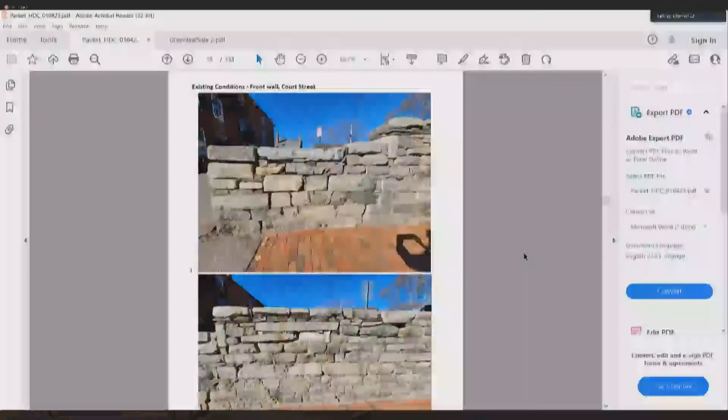You'll see from the photos in the packet it's mostly the old original stones, but there's also a mix of little pieces stuck in. There's mortar in some places, and some newer stones, which you can see are of a different type of granite—split and drilled. They're not the same stone as the original; they're a different color and texture. That's the wall along the street.

These photos are sequential, walking down the sidewalk from west to east. The first photo is at the driveway that ramps up into the parking lot. I took three paces for each photo, so that's about 9 or 10 feet of stride to get to the end. All the way down Court Street are close-up photos so you can see the nature of the stone and the work that's been done.

There is a side wall perpendicular to Court Street, along the property line between this property and the temple. As we go towards the back of the property, it disappears into the hill. It is falling over, it has fallen apart.

At the bottom, there used to be a firehouse, so there are brick remnants of the firehouse's foundation attached to that wall. There's some brick and concrete in some parts, and a tree is growing out of it on the uphill side before it sort of disappears. So that section is also proposed to be removed and rebuilt, so it's sound.

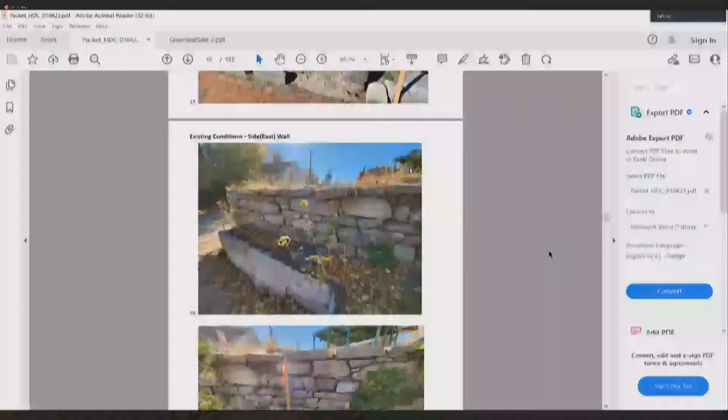All right. So we had intended to keep this wall, and we redesigned the building to do that. And then when we started getting on site to investigate digging the foundations for the building that is set quite behind it, we found more bedrock than we had expected. And in fact, some of it is contiguous and right underneath this wall. So any excavation or removal of the bedrock will cause vibrations which could jeopardize this wall, and we want to protect it.

We looked at shoring it in place and putting supports on either side, but to do that there are a few issues which are described in here, and Lee can describe a little bit more. It requires holding the braces together, which would have to go through the wall. Because this wall is 3 foot deep at the bottom, it's 4 feet thick, it's 2 to 3 feet at the top, you can't just drill through it without piercing stones. The mortar joints don't go straight through, it's a multi-width wall, so that would cause some damage.

Also, we need to go under it in 2 locations for street utilities, electric service to the building, and the sewer connection. There's also no footing, there's no frost wall under this wall, which is one of the reasons it moves over time. We feel it would be more stable if we could put a proper 4-foot frost wall underneath this so it doesn't move in winter, and also to reinforce the back structurally so that when it is backfilled, it doesn't keep leaning over and requiring repair.

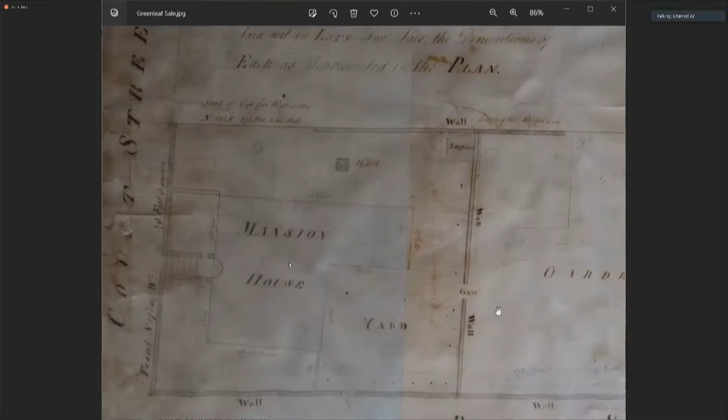But the next slide took this map and we superimposed the boundaries of the property as it is today using GPS technology. I'm working on it, all right, well, he's working on it.

And I just want to clarify, I've heard the term used several times tonight that this was a pound, where pigs were held. Actually, this was called a place of refuge during the Indian Wars. There is no way you'd have a place of refuge with a 4-foot wall. It was called a castle for a reason, the walls were high enough that you couldn't penetrate them. So the idea that this was somehow a pound for the city doesn't reflect the facts. Let me show you right here.

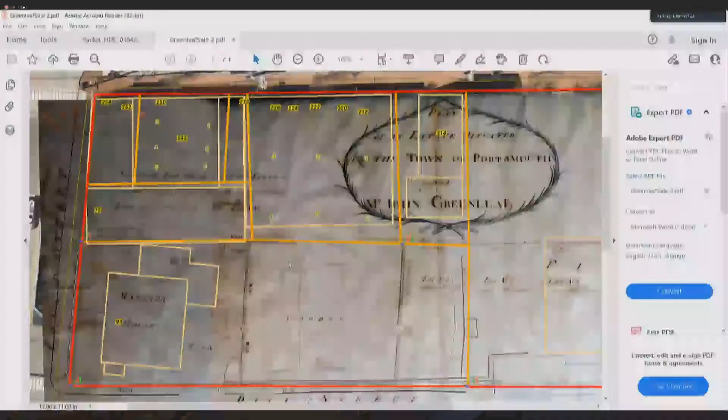It says garden. These are the boundaries right now. This is the wall, red on the bottom, turning yellow as it goes up. This line here is another boundary between this part of the garden and the stables. So within the property, you had the garden, the stables, which mansions of that era had for carriages and horses, and a place to grow the food that the inn would consume.

This was called the Brewster Gentile Inn. There is no way that they would have allowed pigs to be running around next to a genteel inn, any more than we would have pigs running around the Sheraton today. It's pretty comparable to that. So to say that that was what it was in those days, I kind of doubt it.

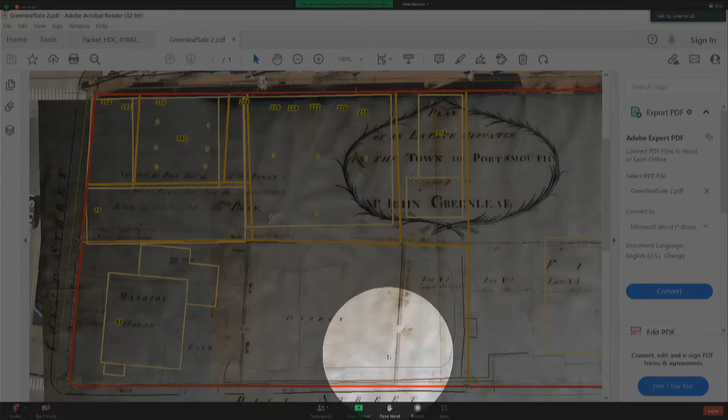I think the map kind of speaks for itself. The fact that there were lots available in those areas, maybe the town took it over for that purpose, but they were not within the retaining wall. I grant you the retaining wall in this area was not managed right, because when you look at it, it was not preserved. People were careless many years ago. But this one here is very prominent. Everybody can see it. It's part of the original structure.

I just brought this in because I wanted to show you there is more to it than we have been told tonight. I realize you have to take it down in order to protect it, and when it comes back up, it's not going to be the same. I'm torn because I know what you're up against, and I know you have to do something. But I'm also on the side of history. There's so little left to preserve.

Have you seen that little model at the entrance of this hall? That's the old State House, because Portsmouth used to be the capital of New Hampshire in monarchy days. The portico of that State House was where George Washington came and spoke to the people in 1788 or 89. That structure was removed because it needed to make room, right across from North Church, at that intersection. It was removed so we could make room for the new, and put aside to wait until we could preserve the old history somewhere else.

That building was cut up in pieces and stored in a container in Concord, New Hampshire. I've inquired—there's nothing left other than just rotten wood. Nothing left of that structure. That's where the city council met in those days. That was one of the most important buildings in Portsmouth, next to the church. That's where they usually build them.

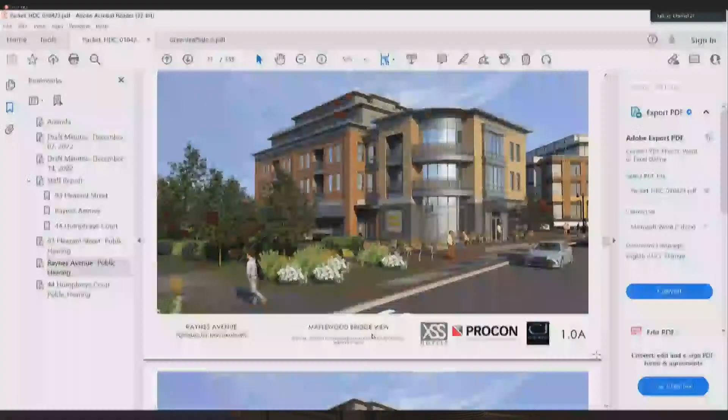When we last met, we had some very in-depth discussion regarding the liner building on Maplewood Avenue, the 3-story piece, and there seemed to be consensus among everyone that making it look like a somewhat different building, and essentially, I think as you can see from the renderings, we've really taken it to another level of development, developing the details, developing some of the expressions of window patterns and so forth, kind of making everything more cohesive.

So what we were stuck on was whether or not it should have a much more clean, modern look with a projecting balcony on the corner, or whether it should be more of a flush representation as you see on 1.0A. So starting with 1.0A, we're looking at the flush execution of the balcony here. What am I doing, Nick? It's not lighting up. There we go. This flush balcony.

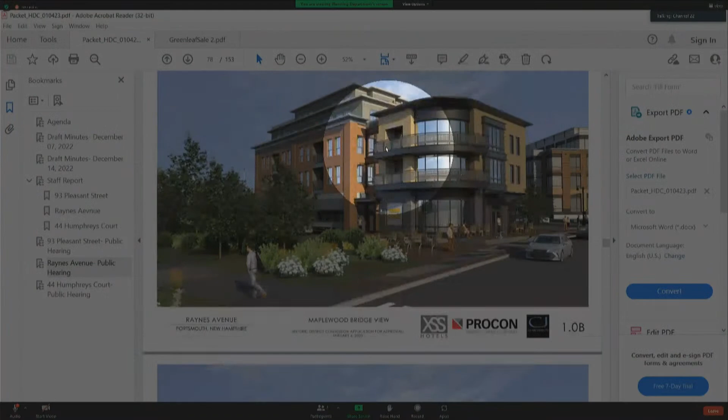And then looking at 1.0B, we have a more prominent, darker color, and we've projected the balcony and wrapped it more entirely around here.

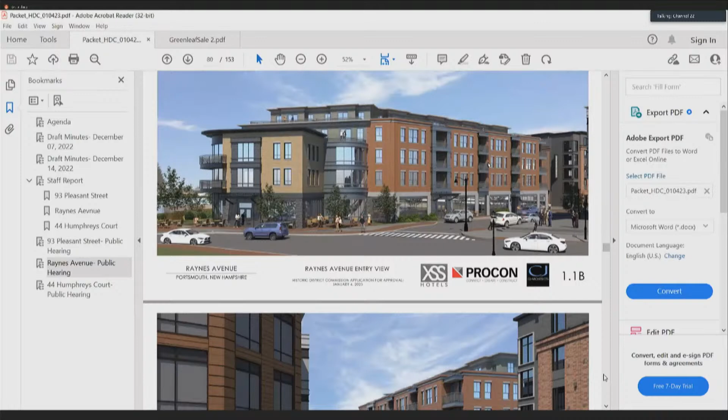When you look at 1.1A, that again is the recessed, the more flush balcony look. And when you look at 1.1B, we have the projected balcony cornice with the more black finish. We've also represented 1.2 showing the darker cornice and the gray cornice on 1.2B, so there's not a whole lot of difference there. And on 1.3, again, just showing the balcony projection all the way to the right to give you an idea of what it would look like from that perspective.

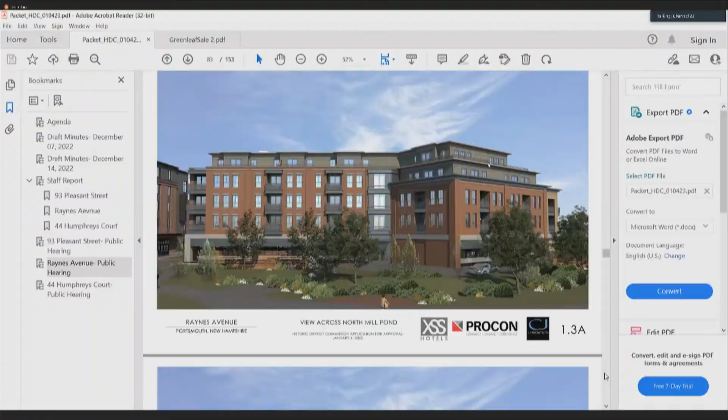You're just sliding right through this. Well, I'm going right through. I have a couple questions, so I understand. That is the end of my choice presentation. That's it? Yes. Does anybody have any questions concerning the initial 1.0A or 1.0B?

Do we all see the differences? Does anybody have an opinion? I think it's most prominently represented in the first two images, the 1.0 series, instead of what we have up. Any opinions? Does anyone have an opinion? Rich, you've been oddly quiet. Yeah, the cornice and the balcony.

I think I'm preferring the more flush balcony. I think it just is a softer feel, but I'm not against the other projected balcony either. I kind of like that cornice.

Either way, I think you've done a good job of stepping down, so it steps down in the neighborhood nicely. I'm happy with that, especially the rounded edges and making it look like a different building that's just connected. But those are my two cents.

Any other sense? Reagan? Well, I agree. I think partially because I feel like you've just done a more thorough job of articulating A than B in your renderings.

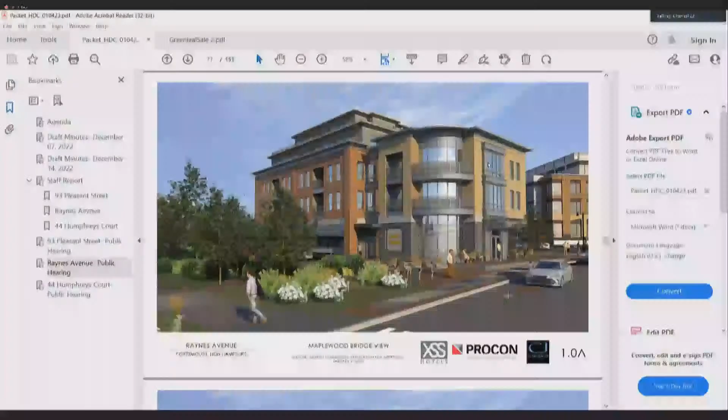I don't know how you're going to get that smooth, looks like a metal finish. An Alucobond finish. Okay. It doesn't seem to, that design and detail doesn't really seem to mesh with the building in general. So I think the simplified and more flush A version is more attractive.

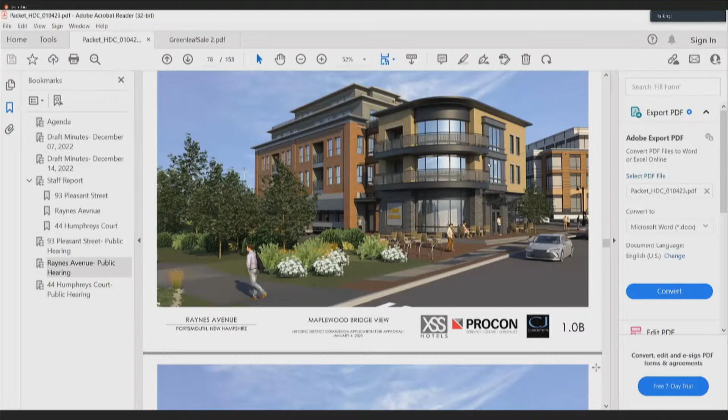Okay, I would just simply say that either one of these are acceptable in terms of what we should be looking at, so either one.

Mr. Chairman, I would agree with Mr. Ryan. They both have, they're two different sides of the same coin. I think the pieces and parts are very much, one gives you more of a horizontal feel to it, the other reinforces the vertical nature by breaking that balcony up with the flush model. And I think, as almost always, Martin is correct.

God bless you. Can I just say, I wonder if it's probably way past time to have this, but over the Christmas break, I've been thinking about this building and where this is headed and how poorly equipped I am to even make any assessment about it. But I keep wondering why this building doesn't have a side that faces the water. If I were building something with this much coin and this depth of plan, why it doesn't look at the water at all.

And I'm reminded of the first building you showed us, 20 years ago, something somewhere in Baltimore, some piece that you'd picked up, a little bit of eye candy. It was a striking building, but what was interesting was that we really weren't looking at one end of it from a side street, that it was a view that the building had.

Well, in the last session, we implemented quite a few changes on the mixed-use building with projecting balconies and adding some different entry elements and canopies and so forth. So we made the siding darker and changed a little bit of the window pattern. So there were quite a few updates from the last round to the other building.

Did some work on the cornice, and I think everybody seemed relatively satisfied with the change, with the significant amount of changes from our last work session on the body of the building, on the 4-story and 3-story pieces of the building.

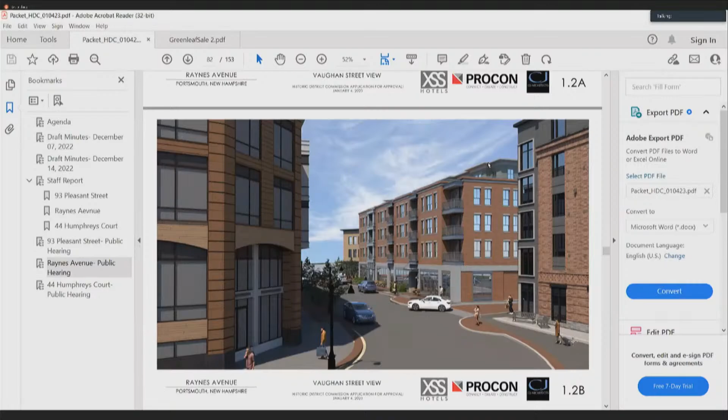The hotel is as it was prior as well. We've been concentrating, again, at the last work session, primarily on the mixed use and residential piece.

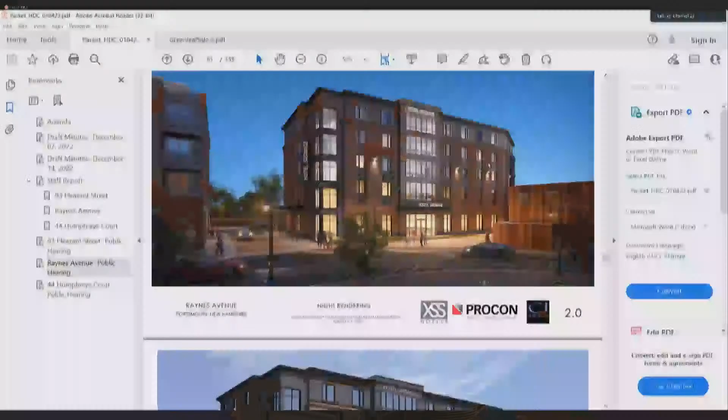Prior to that, we did quite a bit of work on the hotel in 3 or 4 consecutive work sessions where we arrived at this final canopy, the metal on the outside corner, and a lot of the brick texturing. There were quite a few updates a couple of work sessions ago, where we found it most beneficial to address one building at a time because they are fairly significant architectural creations, to work on one building and then now work on this building. But they are part of the same application.

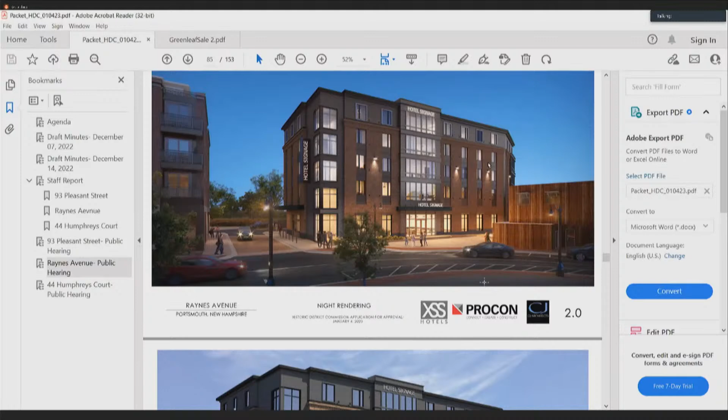Anybody else want to have anything to say? Nick, is it possible for us to look at the model? Give me a minute.

I will do the whole presentation when we let her do that, go to presentation. I mean, we're in work session now, but when we go to public hearing, I'll review the package. Okay.

So just to confirm, there were no other changes on B, C, or D, right? Just the cornice and that balcony shown in A? Yes, the cornice color changed, there were some color changes, the projecting balcony, and I believe we had consolidated all the window patterns because the smaller squares were not well received, so we went in and adopted all the same window pattern.

Well, you did drop a door in the rounded section, yes. And did you add a door? Is there a door on B? There is not, because it's accessible around from the projection, right? Okay. So that's where they'll store their furniture or something. I hope not. Oh no, I hope not.

On the right-hand side of the reconstructed timber pier, there's kind of an inlet, and then it curves around and goes back out onto city-owned property. But right at that location, the soil can be green. It's green there—I've seen it.

So, I know there was a dump. This is just the site plan, and I'm sorry, I should have probably brought this up at the work session, but are you aware of that?

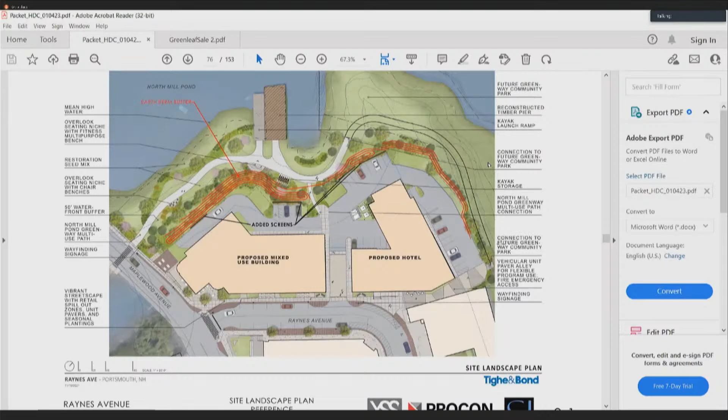I'm aware that there's an outfall for the city storm drain right there, with a head wall in that inlet area. We're proposing, as part of the site plan approval, providing an easement to the city to replace that. We'd also be replacing a lot of stormwater facilities and treating stormwater leaving the city streets as well as the site before it goes out. I wanted to get that particular bit of information into the public, because it's more than an outfall. There's some kind of dumping that had gone on there probably 100 years ago, and I suspect it's copper, but I'm not sure. That's the only question I have on your site plan. Thank you.

Is anybody else? Can I just say something about the site plan before we go into the details? I think, in fairness to the many speakers we've had over the many meetings who reference the 2015 vision plan, which was a charrette, a design charrette with hundreds of people participating.

There was wide public agreement on the vision for properties like this in the North End, on Raynes Ave, Green Street, everything we've been looking at in the last couple of years. I think everybody falls into this at a different level of either support or disappointment with perhaps the massing, scale, and rhythm of what's come to you on this site.

So I think that beginning the presentation on 1.0A, we've looked at the choices available for the building along Maplewood. Just to reinforce for people who are just joining us, this is the culmination of many, many work sessions on both buildings, both separately and combined. And I would say that we would stipulate that the flush balconies be a stipulation as the choice for approval, based on what I've heard.

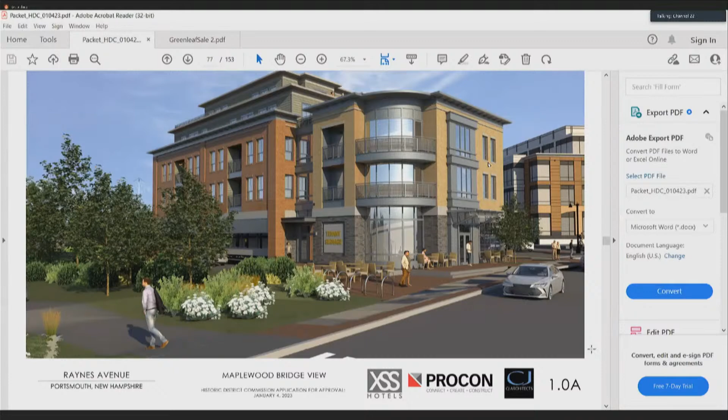So looking at 1.1A, you can also see the changes that were implemented during our last several work sessions on this mixed-use building. The final changes are projecting the balconies and redesigning the entrance.

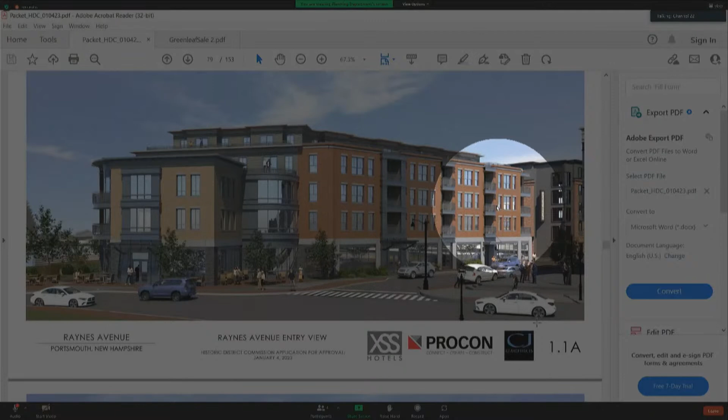Redesigning this main entrance of the residential, projecting these balconies, darkening the siding on the upper floors, and providing a whole new identity for the building along Maplewood. We also created a much more organized facade, and eroded the top of the cornice here at all the balcony locations.

Skipping B. Again, 1.2A is just another perspective of the changes I just described.

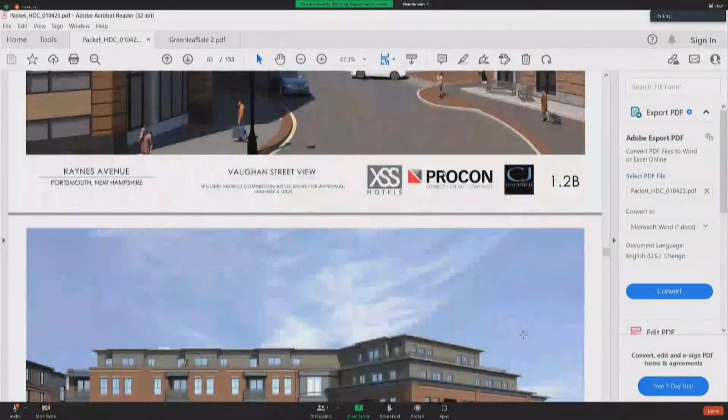1.3A carries the theme of projecting balconies around to the water side, again with a well-defined entry piece, and then the cornice drops down to a 3-story brick structure, an additional setback here, and then the penthouse level. The 4 stories and a penthouse drop down to 3, and then drop down to 3 without any structures above, sort of cascading down toward Maplewood.

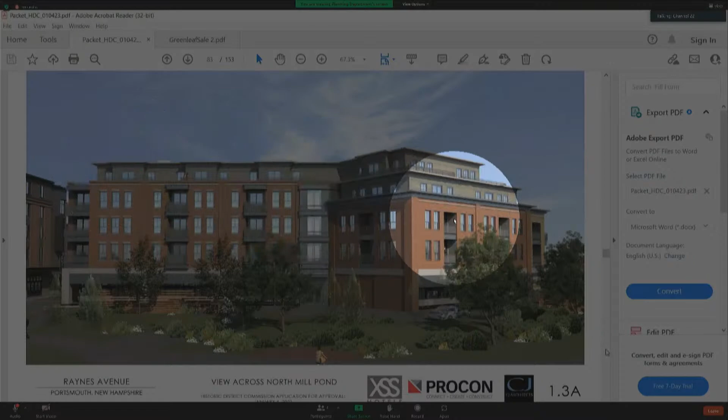And, you know, that is abandoning the 5-story building in this location.

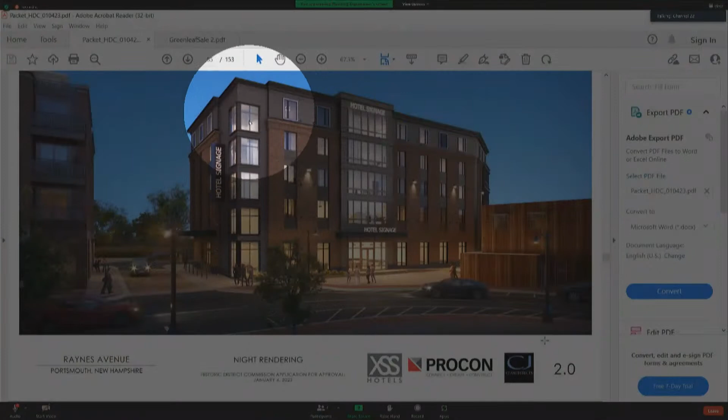Skipping B, moving on to 2.0, night rendering of the hotel. Again, illustrating the corner element that was brought into the design during work session, the more dramatic canopy with a little bit of a different look, more vertical dramatic glass elements here, and the brick banding is not as visible in the rendering, but we will see that in the following page on 2.1, where the textures are a little bit more prominent. Banding along here.

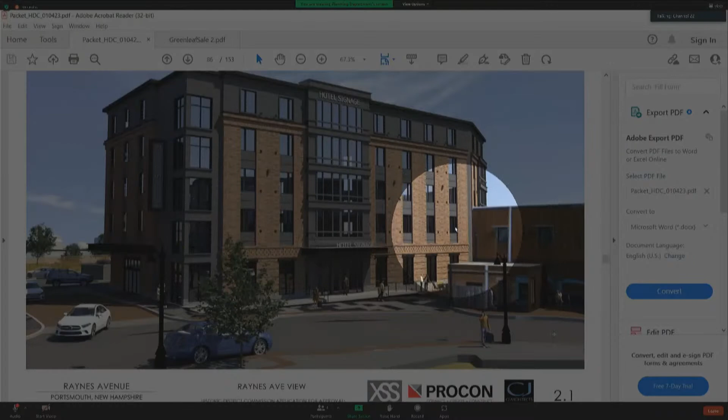A different metal element at the top, on the top floor, and then we also have a textured brick base along the entire first floor, and we added in work session a gray base color, again wrapping and supporting the base of the hotel.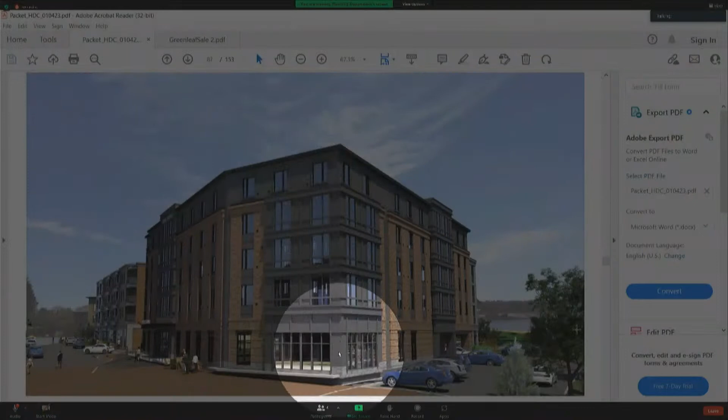2.2 highlights the dramatic corner overlooking 3S, and then another entrance here as you round the corner to the water side. Then when you get to 2.3, you can see that as we again approach the water, the hotel actually steps down to 4 stories for a bay of significant mass here on that corner.

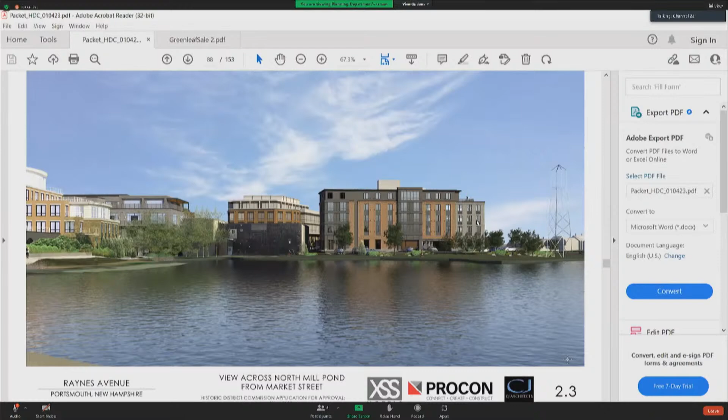2.4, close-up of that same view. Again showing the brick texturing band and the band in the base elements, and then also the cornice carries around. We talked quite a bit about working on the cornice during work session to give it a little more weight and volume.

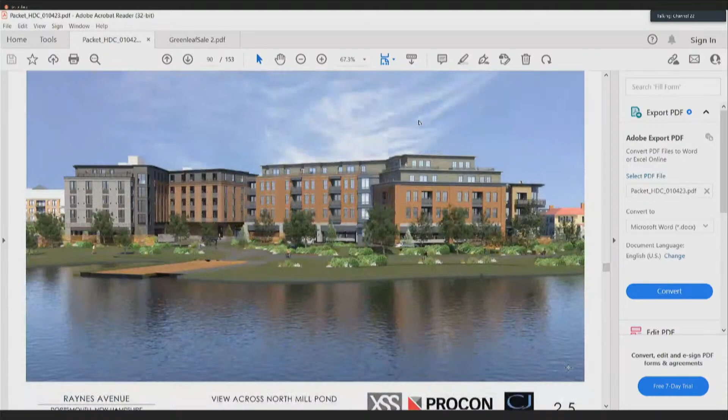2.5 illustrates the view from across the pond, through the park, and the restoration of the docking area or the pier, and then of course the 5 different style elements across the water side.

And then as I get to 3.0, in the interest of time, these are the construction documents required for submission to the board, to more detail, to represent all of the details of the building as well as the size and dimensional requirements. I'm happy to answer any questions that you may have on these.

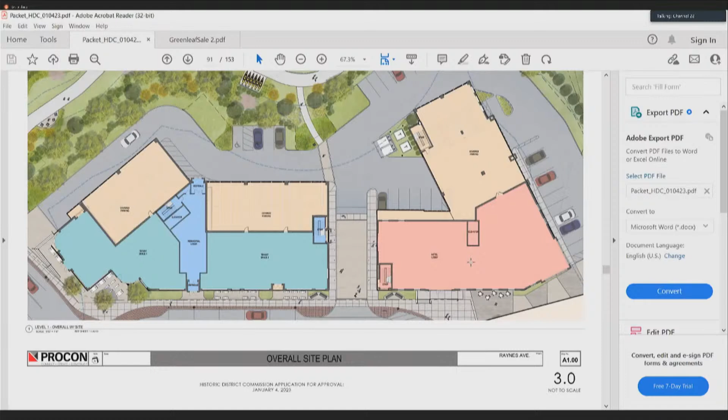At the end, we could possibly just move to section 5, because there is a significant amount there, but we could move to section 5 and look at materials if you like. Look at the 3D. We can do that too.

Does anybody have any questions at this point? What has already been covered? No? You can see there's many, many details.

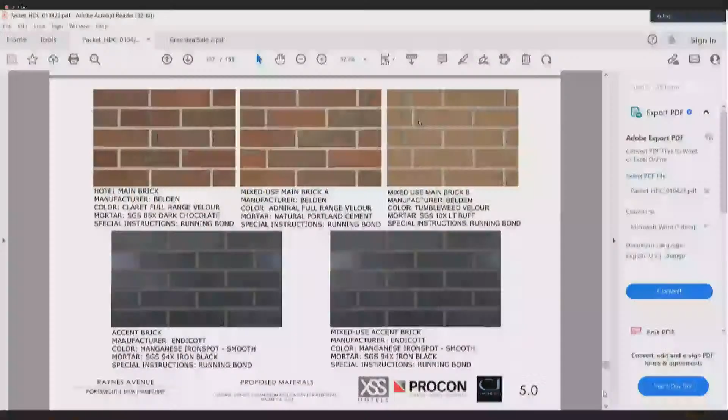Yes, there we go. So here in section 5, we're just illustrating the materials proposed for the project, which consist of multiple actual brick veneer colors, as well as the metal panels from Vitrabond, which is like a sandwich panel of metal for some of the siding elements, and all of these areas are called out on the elevations and indicated.

When you get to 5.2, we're using Marvin Essential, so we are not using any sort of vinyl products of any kind.

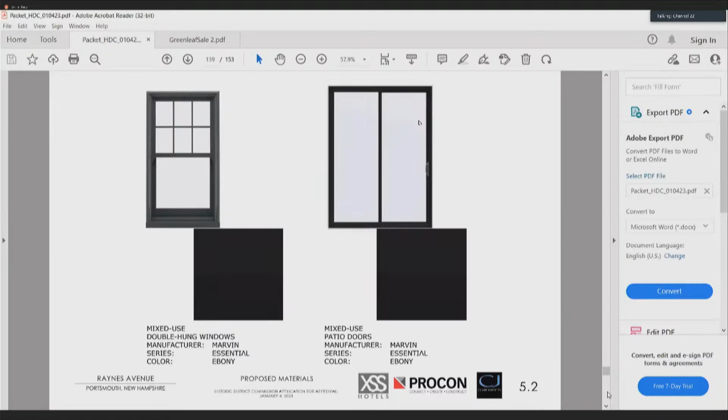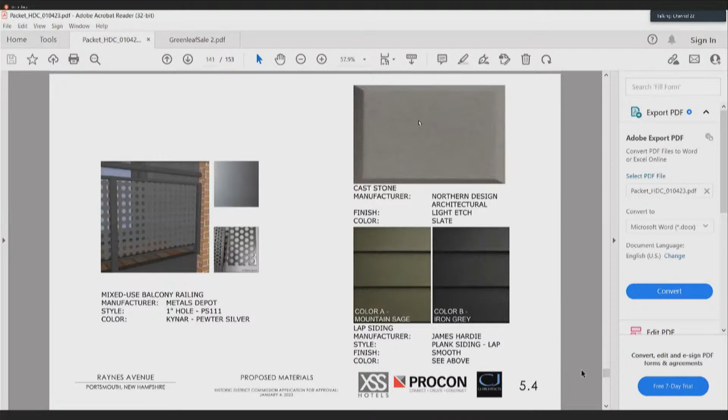Quality of materials has been a long-standing mantra of the Historic District, so I just want to reinforce that we are using the higher-end windows, actual masonry and metals, and not plastics and so forth. The upper levels do go to a lighter material, where we are using siding in a pre-finished color, and then the balcony railings are also metal.

Continuing on to 5.5, the proposed light fixtures. And I think that concludes my presentation, unless you have any other questions that you'd like me to answer or any details you'd like us to go over.

Oh, I'm sorry, I have a material question. On the site plan, way at the beginning, there's added screens called out as part of the berm structure. Are the materials or style of those screens indicated anywhere?

That is a good call. Luckily, we have an example standing just down the block. I don't think they are identical, but I think the intent and what we had shown in the renderings was similar to what was approved and installed at 145 Maplewood, and also at the entrance to the future park. It's an IPE fence system. We could certainly stipulate that if the board likes, we could stipulate that be the material. It's a 6 foot tall fence, 1 by 6 or 5/4 by 6 at the base spaced, and then it's slightly smaller and varying widths as you get closer to the top, capped on top and sides as well. I think it does show up in the rendering.

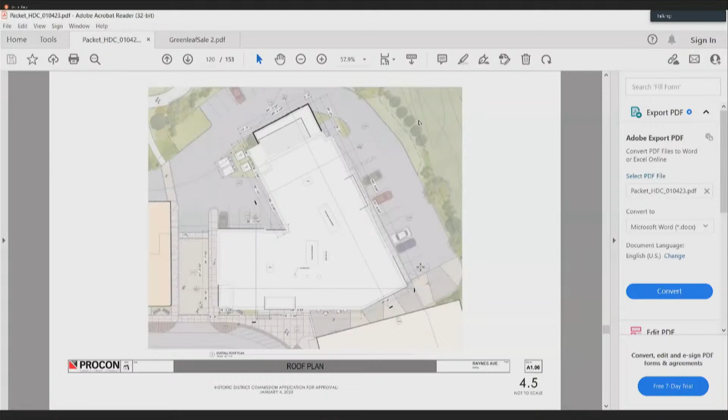Yes, that's true. 3.6, right here on the roof plan. It was 4.5 that's the plan, and if you look at the renderings you can see them. 4.5 shows them as well. If you look at the renderings, they have been modeled, and you can see - let's look most at 2.5, you can start to see them popping up in the model, because that's the farthest back view that we have.

There's only one elevator in that building? 2.5, yeah, the mixed use? Two cabs. Yes, one shaft, two cabs. One overrun then.

Is that the color you're going to screen it or paint it? And is that metal? Those are just the masses - we haven't modeled each individual piece of equipment, but those are the massing.

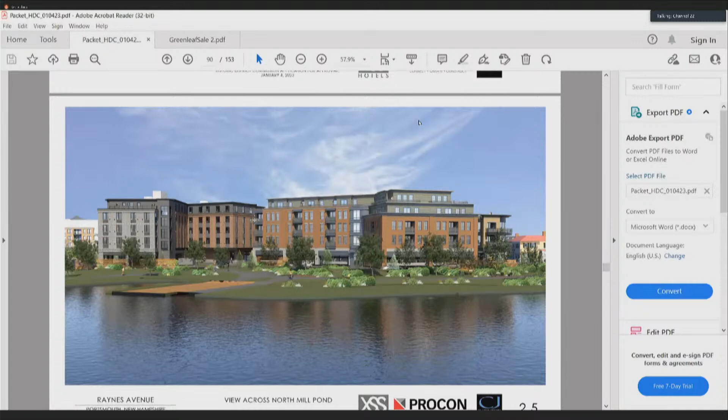You'd come back for administrative approval on all the mechanical screens? Sure. And unless they're in here - there's no screens in here? No screens. Okay. I don't recommend screens because I think they just create more mass around the mechanicals. It could be paint, screen, whatever it is.

Right, okay, dark. There's no restaurants proposed at this time in there, so. Probably will be, right? Yeah. We certainly aren't precluding there from being restaurants in the space, so there could be fans coming up to the roof level. We have accommodated with some shaft space within the building. So the tenant space is on Maplewood Avenue on the first floor and also along Raynes Avenue. Could or could not be a restaurant, that's an allowed use.

Any equipment - the only equipment would be a makeup air unit and exhaust fan. You'd have to come back anyway for any equipment to be added. I think we did show on the roof plan - no, we just have the RTUs and the condensers, so I guess there's not a roof fan shown there. So anything that would be added, nothing would be installed at this point, would be added later by the tenant when mechanicals are complete.

Yes, David? This is more than likely way out of our purview, but has there ever been any conversation about a photovoltaic on the roof? Is that something you think about doing? We've considered it. If you look at the mixed-use building, there's a lot of equipment up there which sort of breaks everything up. The hotel, certainly we could look at potentially in the future - there's more open space on those roofs, but as far as I know, we would also have to come back for that to get it approved on the roof.

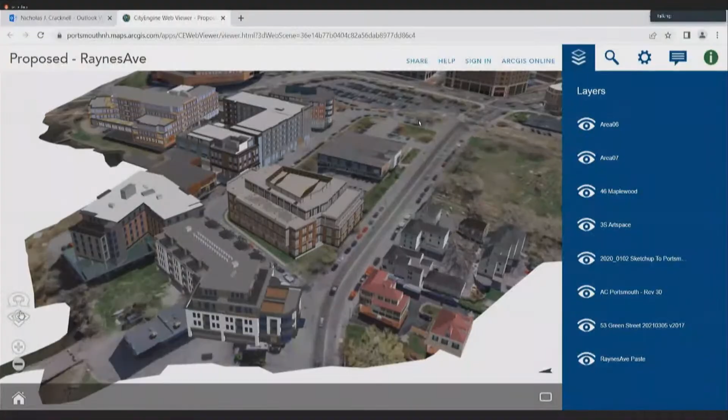Before I sit down, I just want to say the city model appears to have lost all of our materials. We are not proposing a white building. Well, thanks for saying that. I don't know why that's the case. It's a massing model. Hello again, Duncan McCallum, back here again.

I'm back here to rebut some of the comments made by the gentleman representing the developers a few minutes ago. He says he and his comrades are entitled by right to build the building they're proposing, that it complies with all zoning requirements, and that they could have built an even bigger building. He obviously does not understand the function of the Historic District Commission, which is that a proposed project can fully comply with every requirement of the zoning ordinance, chapter and verse, without even having to get a variance or special exception from the ZBA.

And yet, if the project is inconsistent with its historic setting, this commission can still disapprove it. Not only may this commission still disapprove it, this commission is supposed to disapprove it. By this time, I think we've established that architecture is not the only thing to be considered, that excessive height and excessive mass are grounds for disapproving it if it causes it to be inconsistent with the historical character of its surroundings, which these proposed buildings plainly are.